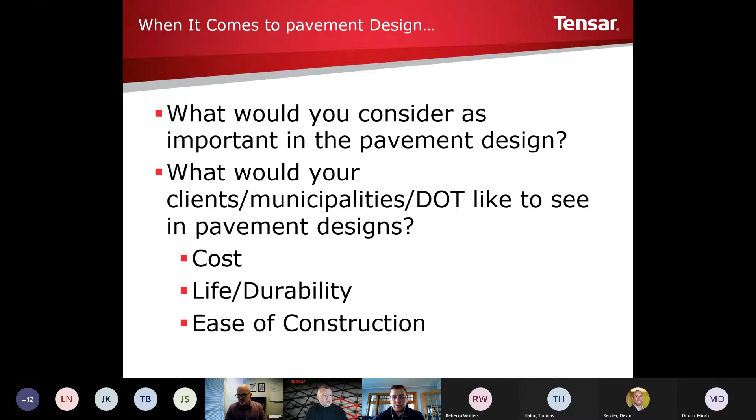Paul, is there anything popping up? Looks like life cycle costs has 3 votes, and all of the above has 2 votes. So okay, life cycle's winning. Okay.

Well, the easy answer is the Tensar triax can help with all three. The geogrids, they save money in the short term and in the long term. In the short term, by using our geogrid, you mechanically stabilize that aggregate layer. But what we can do is reduce that aggregate section when you're talking about unpaved roads. And in paved roads, not only can we reduce your aggregate section, but we can even take asphalt out.

It definitely improves your performance in your roadway subgrade, and that's where most of pavement failures come from; they don't come from top down, it's bottom up. So when you're building on a poor subgrade, and you don't address it at the beginning, that's when your roads tend to fail down the road.

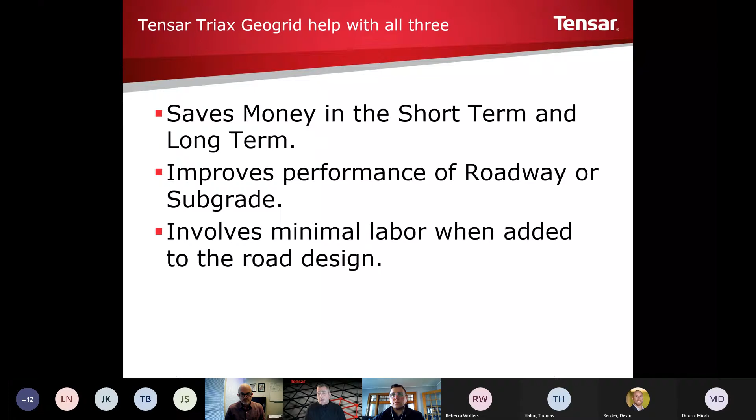And then it involves minimal labor. We've got some videos you can see. It's not hard to install our product. It really just, you set it down and you kick it down the road.

So real quick, I kept this slide in, maybe not so much for this group, but for other groups that I've given this presentation to. I always hear it when I'm out in the field: 'Hey, you sell that fabric?' Well, no, we don't sell fabric. We sell geogrids. But I wanted to go over just real quickly what the difference between the two are.

So geotextiles or fabrics are for separation and filtration. You get some minor reinforcement with your woven, but not your non-woven, that's solely for separation or filtration. And then at the bottom here, you've got your geogrids. These are made to stabilize your aggregate layer, and then you get some minor separation. If you use the proper aggregate, like a 21 AA, you'll get some separation benefits by using that aggregate with the geogrid.

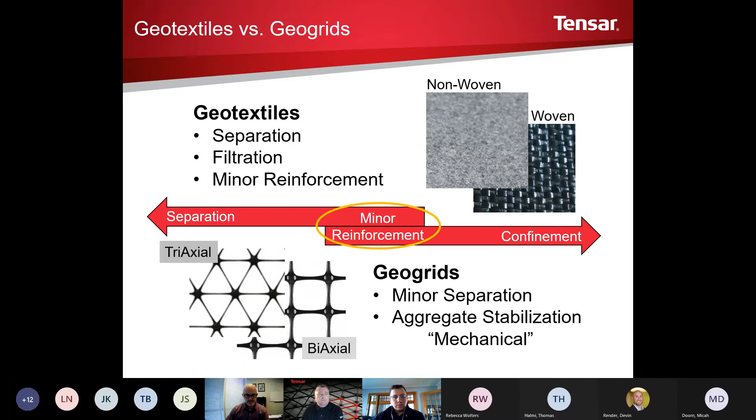Real quick, I kept this in here. The manufacturing process at Tensar, we've been told to take these out, but our product is extruded. It's a single layer process, so it's all one piece. There's no joints or junctions that are glued together, so they're not weak. It's all extruded and it's one piece. That's important when you're looking at geogrids, especially because typically our competition's weak point is at the joints where they adhere two pieces together.

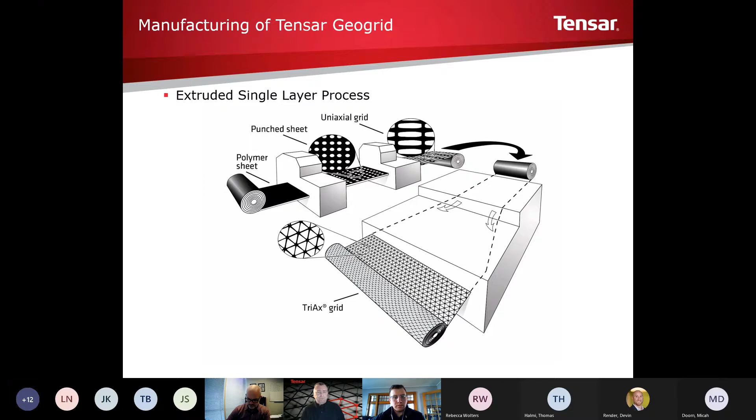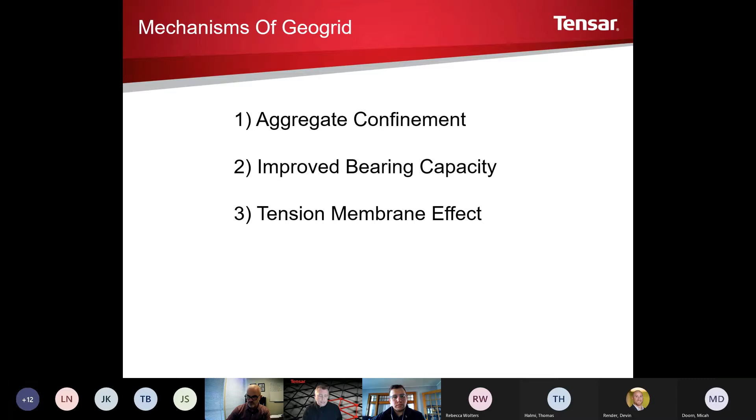All right, so quickly we'll go through the mechanisms of geogrid: aggregate confinement, improved bearing capacity, and tension membrane. Now these are all supposed to act together to make your stone perform better. And this comes from the Army Corps of Engineers.

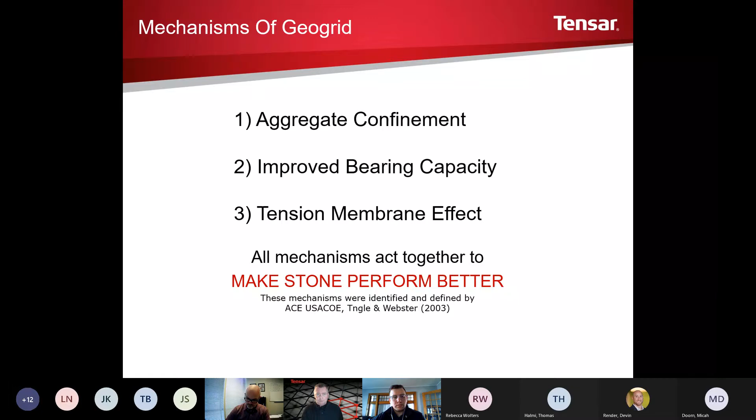So aggregate confinement: our triax geogrid is really designed for maximum interlock with the aggregate. If you see the picture with the stones and the geogrid, what really makes that lock together is the strike through you get with the stone interacting with the geogrid. It just stabilizes that base layer, but the strike through is very important. You want real angular stone to have places to lock onto.

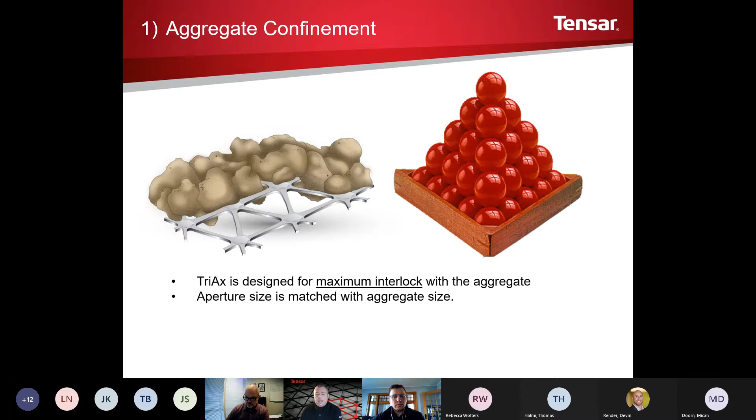The aperture size is matched with the aggregate size. We have three sizes of apertures. A small is our 1.3 inch. We've got a 1.6 inch opening, and then a 2.24 for our larger stone.

With improved bearing capacity, or the snowshoe effect, this seems a pretty simple idea, but because of the design of our grid, as opposed to a biaxial grid, which we'll see in a minute, it really does disperse the weight out in all directions, which makes it perform better than most of our, or all of our, competition.

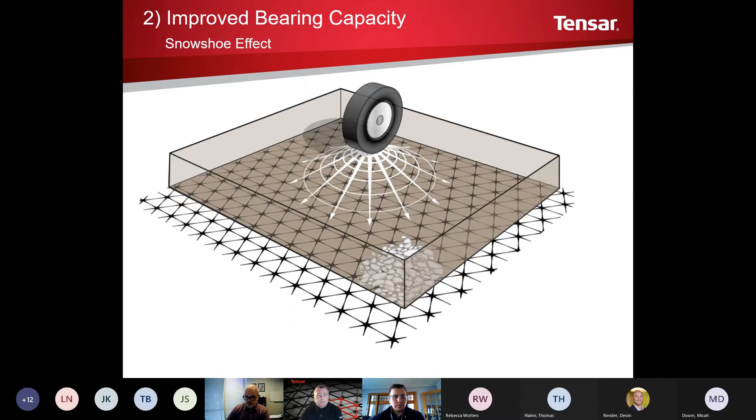Second slide on the bearing capacity.

This is we're looking at a biaxial geogrid versus a triaxial geogrid. This is a polar chart here, with these concentric circles going out, getting more stiff. When we're talking geogrids, we're usually looking at low strain stiffness.

You can see here with the biaxial geogrid, it's stiffest along the ribs, which would make sense. When you go over to the other side with the triax, it's almost a circle in there.

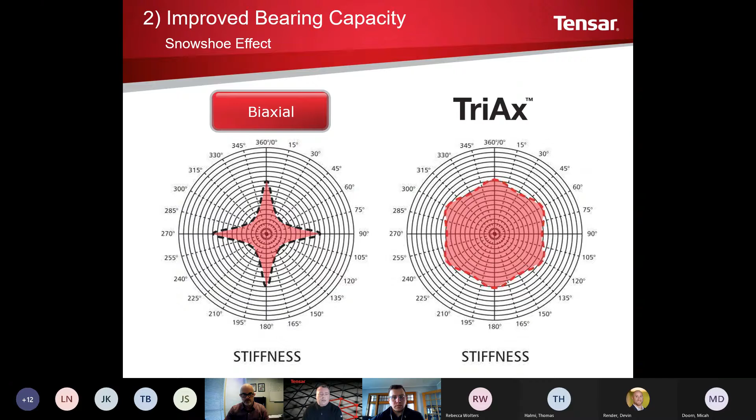Again, because with the hexagon or the six triangles together, it's dispersing that weight equally in all directions, and it just makes it perform better.

The third was the tension membrane. This really applies to geotextiles. When using a geotextile or a fabric, to get any kind of stabilization out of it, it needs to be tensioned, kind of like a hammock. So with the geotextile, you're not getting much stabilization.

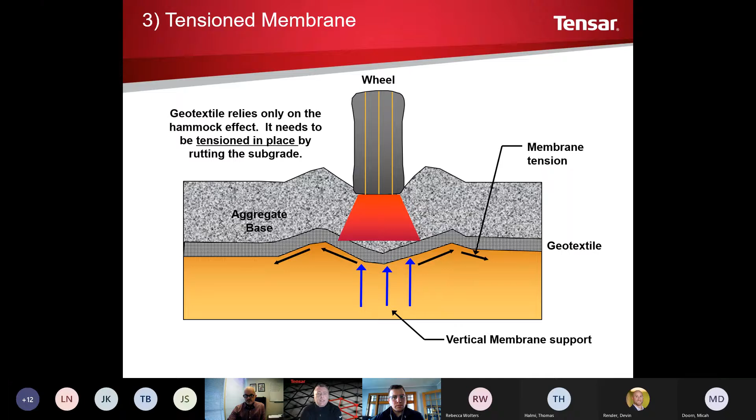It has to fail almost before you actually get any stabilization out of it. So that one wasn't, that's more for the geotextile than the geogrid. But those are the three that the Army Corps came up with for the geogrid.

Real quick, again, I just mentioned it, but these are the two types of geogrids we're currently looking at: your biaxial geogrid and your triaxial geogrid. So when I'm talking about aperture, it's the opening size. You got your ribs, and then the junctions or the nodes.

And in the triax, we've beefed up all of those. We've got a high aspect rib ratio. It's hard to see in this picture, but it's a little bit easier in some to come. The nodes or junctions have been supported. So the triax is very superior to a biaxial geogrid.

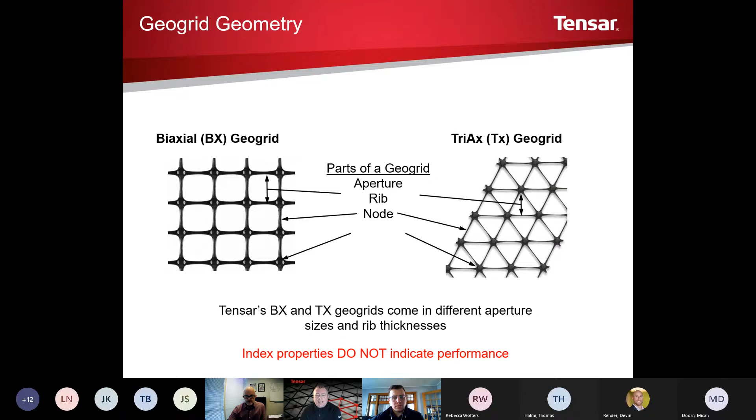And one thing that I'd like to note, that index properties do not indicate performance. And we can show you that by the next two slides.

This is the Giroud-Han design theory. I'm not going to go through it. To be honest, I'm not sure if I could, even if I really wanted to, but we're searching for H, or your aggregate base thickness, in here. And if you look close enough, you'll notice the one thing that's not on there is tensile strength.

A lot of BX specs come out solely on tensile strength, and that's at one point that's all Tensar sold as well, and so we were probably guilty of pushing that as much as anybody else. But tensile strength is not indicative of performance when it comes to a geogrid. For this Giroud-Han, this is for an unpaved. This is the design theory used for unpaved.

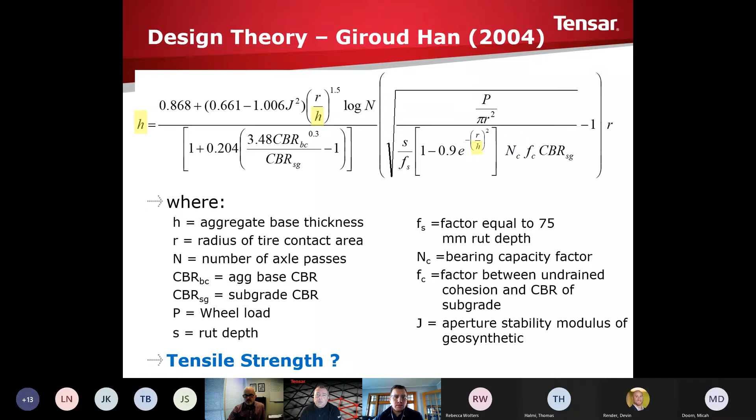When we're talking about a paved surface, or AASHTO 93, it's the same thing. There's nowhere in this equation is there a tensile strength for a grid.

So when grid came out with biaxial, it was an easy thing to look at and say, alright, this is the tensile strength of this, and that's what we're going to call out in our spec. But it's not very indicative of performance.

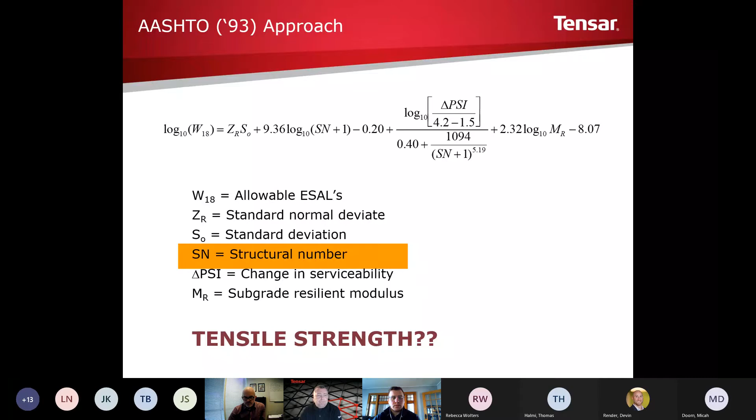James, we had a question about what happens to the waste product from the manufacturing process, when we're punching and drawing the grids. Yeah, we capture and recycle all of our waste, and reuse it. Was that? Yeah, I think that answers it.

Well, we capture it. It's been a while, so we've got a lot kind of stacked up over there. But yeah, we use it all. We recycle it and reuse it.

So why BX or why TX versus BX? I started on this a few minutes ago. You can look at the top, the junction strength. This is very important because the weakest spot on most geogrids is going to be the junction. And on our triax, we really did beef up that joint or that junction.

Another thing that's very important is the rib profile. If you look under the BX, those look flat. And that's not just the picture, they are flat.

With the rib profile for the triax, when we were designing it, we took that biaxial rib and basically just turned it on its side. But there's a lot more surface area for the stone to grab onto, which is very important. That high aspect rib ratio adds a lot to the performance of any geogrid.

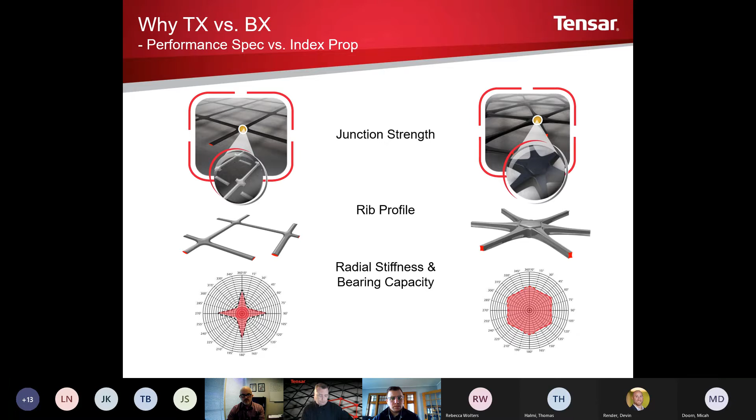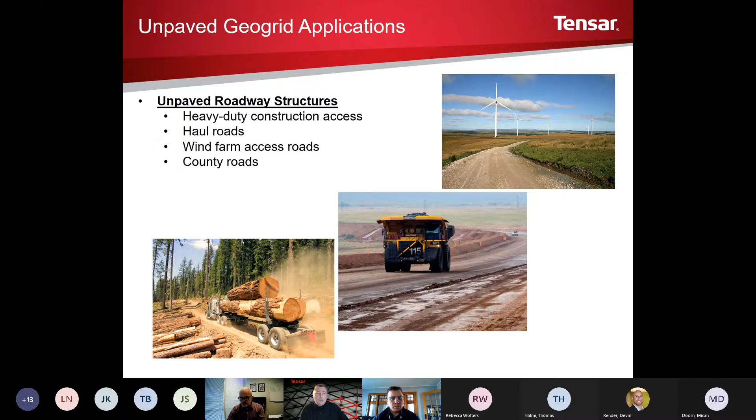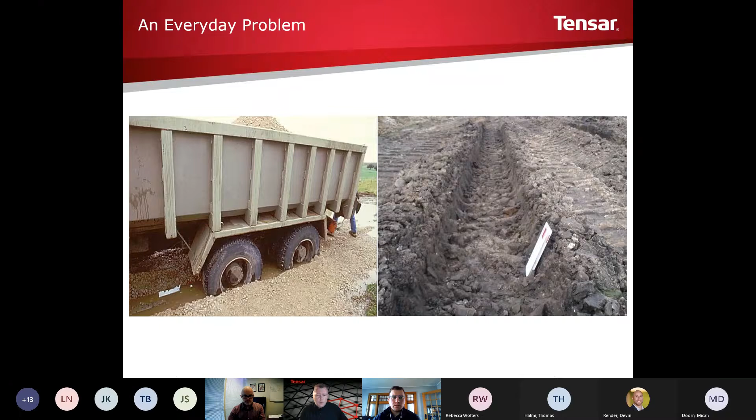All right, so we're going to go through subgrade stabilization. Any unpaved surface that you're looking for: heavy duty construction access roads, wind farms, county roads, anywhere that you're not paving. I mean, this is our bread and butter right here, soft soils. It's an everyday problem. I'm sure you guys have all seen it just as much or more than I have. But this is what Tensar can solve for you with our grids.

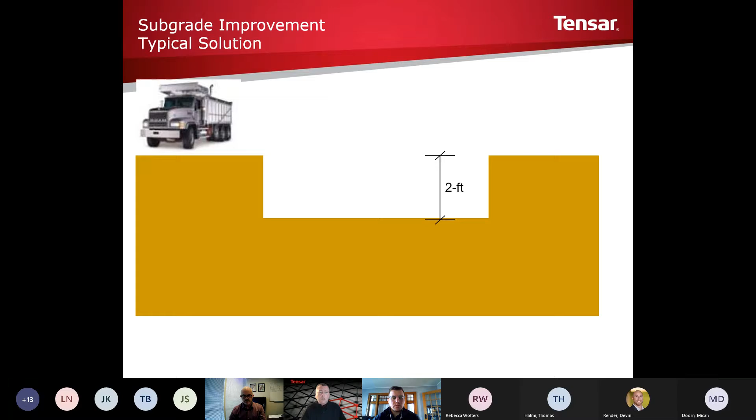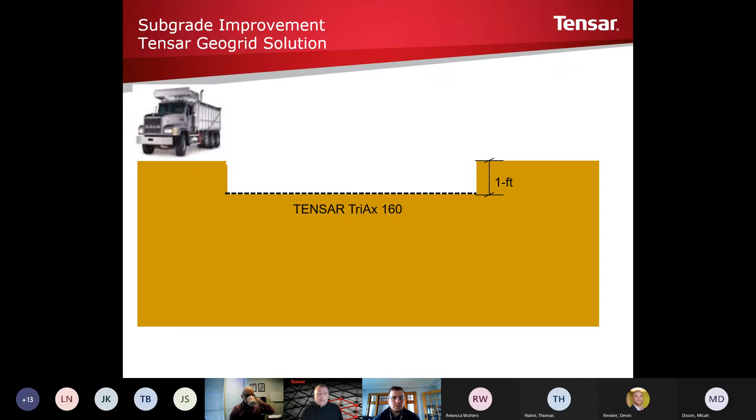With the Tensar, though, in that same situation, you can see we excavated, but it's half. In the first situation, you were digging down 2 feet. With Tensar TriAx, you reduce your aggregate section up to 60%. And in some cases, you wouldn't have even had to undercut anything. If the subgrade was a certain CBR, we could roll the grid out right on grade and go from there. But the performance of the TriAx, again, it can reduce your sections in half or more.

I apologize. It seems like I'm going through this quick, but I am. So let's look at some of the costs, or industry costs. The example here, if you looked next to the unreinforced, we've got excavation at $5 a cubic yard. And these prices, whether they're low or high, aren't going to have a huge effect on the outcomes here. But just know that the higher those prices are, the better the grid actually looks. So if you're looking and saying, 21AA, $18 a ton, that's not even close. It's probably not right now, but again, the higher that number is, the better the grid would look.

So in this situation, we've got a section that we've designed to, and I guess in the end it doesn't matter what it is, but it came out to 24 inches of aggregate over a subgrade of a 1.3 CBR. 1.3 CBR is pretty low, so I'm not surprised that there's 24 inches of aggregate. Well, let's go on the next side of that. What would happen if we put a woven fabric in there? Again, all the original costs are the same. Unreinforced, it came out to $24.88 to build that section or that system. With the fabric, and these are average prices, we put in $2.50. So it did take a couple dollars out as compared to the unreinforced section, coming in at $21.

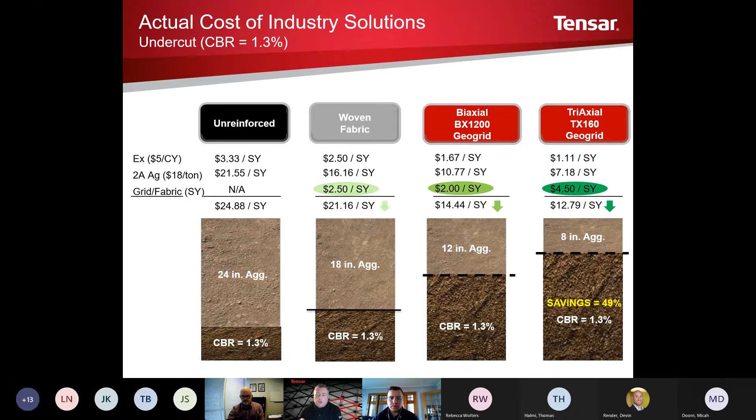Now here's one of just all Tensar solutions. Actually, it looks like the stone went to $20, but the excavation is $5 a cubic yard. And you can see it's similar to the last slide. Even with your biaxial geogrid in there, $15.67 with 12 inches of aggregate. We make a TriAx that costs the exact same as a biaxial geogrid, but it actually gives you 2 inches better of performance. So we can take 2 inches out just by using another product that's the same price. So you can see that one came in at $13.39.

When you start getting into our higher end grids, the third one over, our TriAx TX5, that went down $1, and it also reduced another 2 inches of aggregate.

The farthest one on the right, our TX7, that's at present our highest performing grid at $5. But look at the overall cost. Even though the grid itself costs $5, your aggregate cost went way down. So we're trying to look at these as system costs, not just product costs, because when someone gets that $5 square yard price, not everyone can get past that. But when you look at what it's taking out of the project, being aggregate or HMA or labor or excavation, the overall cost using a higher end grid is almost always the lowest.

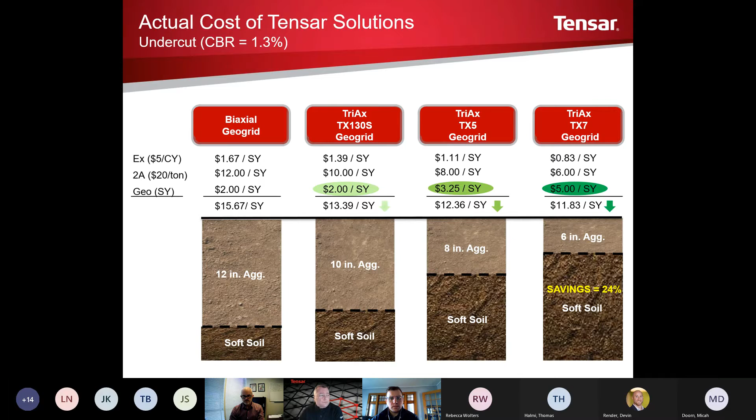Real quick, just to go over again what I just spoke about. By using the Tensar Triax, you can reduce your aggregate sections or requirements up to 60%. Again, that's going to reduce your labor and your equipment needs. And it's going to reduce the frequency of maintenance because you're stabilizing your aggregate base, your aggregate layer. It's just going to push your frequency of maintenance down the road because it's stabilized and it's not going to fail.

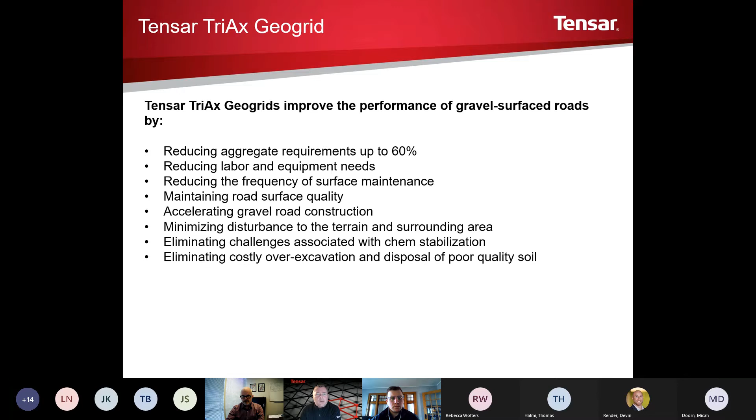And we've got reports that we can show, with schedules for that. Accelerating the gravel road construction. There's just a lot of different benefits for the Triax. Sorry.

James, we got a question, maybe a tough one to answer, but what is the expected life of a geogrid? How would we answer that one? Yeah, it's a tough one to answer. I will say this: we just pulled one out of a project that was in for, I think, 26 years, and it looked like we had just installed it. We actually took a section of it and we have it hanging in our R&D department, and they're doing more tests on it now. They said that was almost 30 years old.

Paul, I'll have to get back to him on that. I don't have a set date, that they last 30 or 40 years. Yeah, I'll get back to them on that. I think they're assumed to last quite a long time since they're buried and not exposed to UV, et cetera.

Right. Oh man, I just passed my video here. I do want to show this. It's kind of loud.

This is one of my favorite videos. Let's guess where there's no geogrid. Right there, that's where the geogrid ended. That's just an example. The subgrade underneath that whole section was the exact same. You can see how much just putting the geogrid in really added to the performance of that. That dump truck was axle deep when there was no geogrid underneath.

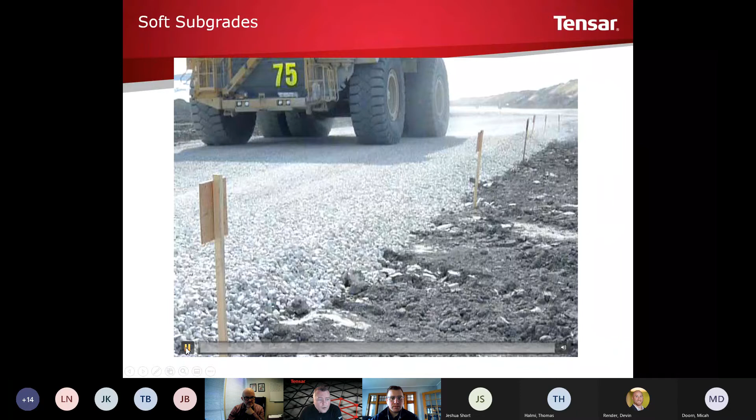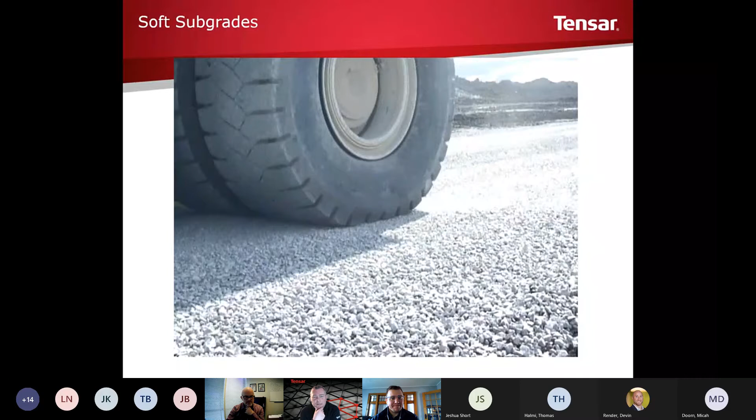James, how heavy was that? Do you know? Geez, 50 to 70,000 pounds. I don't know. To be honest with you, I couldn't tell if it was loaded or not. And you guys have a lot of specific questions. I can look it up for you. I'm not 100% sure. Well, let's go back. Can we get a model number on there? I'm looking under, like it's actually going to change. It was kind of hard to tell. I think your audio goes out when you're playing a video. We'll take that as a side note, try to find out the weight of that. Okay. Yeah, we can find out. With that video, you couldn't really tell if it was loaded. But we'll definitely get back to you on that.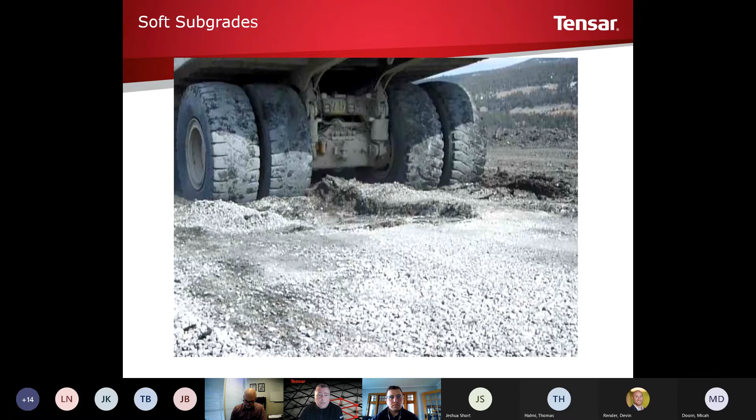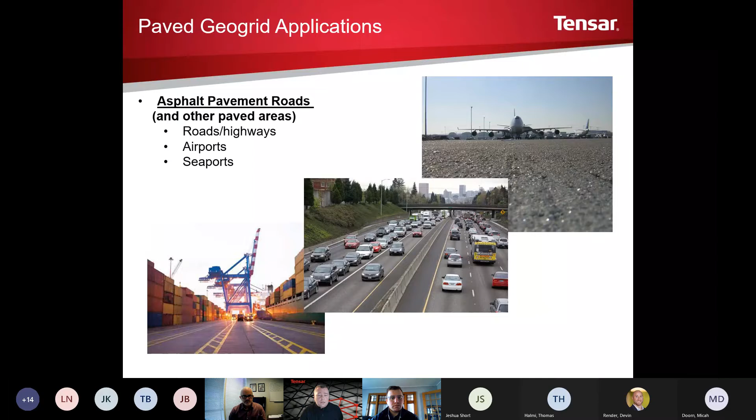But we're going to go over some pavement optimization. I keep these slides in because they're important to show. Anywhere that you've got a paved area, roads, airports, parking lots, any project that you're doing, we can help you out in all of these. So industry solutions.

On the left here, you've got your unreinforced. Again, no geogrid, no nothing. You've got your 3-inch wearing course, a 6-inch binder, 14 inches of aggregate, and then your soil. This was what we were designing to. So again, you got your woven fabric. It did take out 2 inches of aggregate. You went from 14 inches of aggregate to 12 just by using a woven fabric.

But let's look at our lowest end biaxial geogrid under the same conditions. It reduced your aggregate section from 14 to 10. So even by using an old, kind of out of date technology grid, it still works. We didn't stop selling it because it didn't work. We had just come up with something new and better.

If you look at the last section there with the triaxial geogrid, your original section was 14 and we took the aggregate section all the way down to 8. And I listed this as industry solutions because this is what a lot of non-Tensar people would have done in this situation.

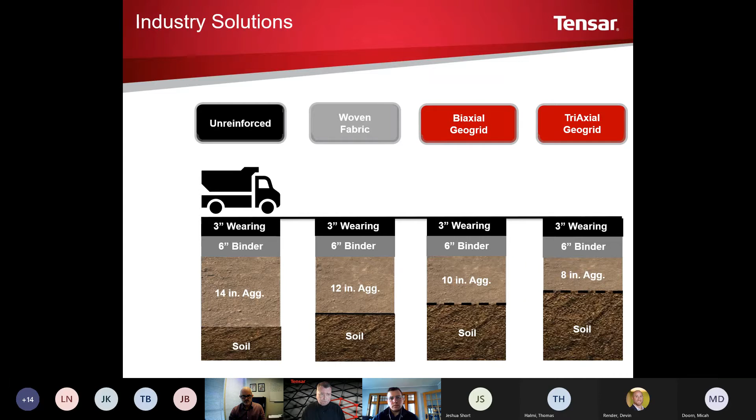But had you actually gotten someone from Tensar involved, we could have helped you with this. Not just taking out your aggregate, but actually taking out some asphalt, some HMA. So here's another example that's up on the top right. You've got your costs. Again, $5 for excavation, $80 a ton for wearing, $70 for leveling, and $18 for your aggregate. And the TX5 geogrid at $3.50.

That actually includes installation. So back to the example, unstabilized, 4 inches of HMA over 10 inches of aggregate. Now that came out to 117,000 ESALs, or a structural number of 3.08, and it's $28.12 a square yard. Now, there's 3 different ways that Tensar will look at this. We can say, you want the highest performance you can get.

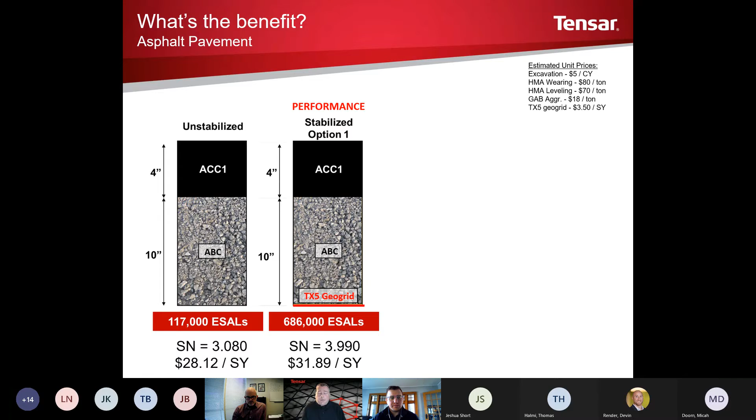Money's no object, and I can hear the laughs even through the mute. But some people actually do like this. A lot of private customers, if they're gonna have to own that road or pavement section, they want it to last. So by not taking anything out, just adding a geogrid underneath the original section, you can see what it did to the ESALs. What's that? It's like 6 times the ESAL count.

It increased structural number, but it also increased your costs, which is why it's only people that have extra money and they're looking maybe down the road to less maintenance costs to offset some of that. But we call this the performance option. No reduction in anything, just put the grid under, and this is what you get.

The other thing we can do is a cost neutral option. You can see in this case, we took a 1/2 inch of asphalt out and a full inch of aggregate. What we're doing here is we just want the cost to be the same. So as long as we don't go under the original ESAL count or structural number, and we can get the cost as close as we can to the original cost, that's what we're looking for here.

And in this case, you can see, we took a 1/2 inch of asphalt out and an inch of aggregate. And even in the original is $28, our section here is $27.64. It's a little bit less, but we're going to call that even. But even if it was straight even, look at the ESAL count. You're still getting about 3 times more ESALs out of your road section, because of putting the geogrid in there and you're stabilizing that aggregate base.

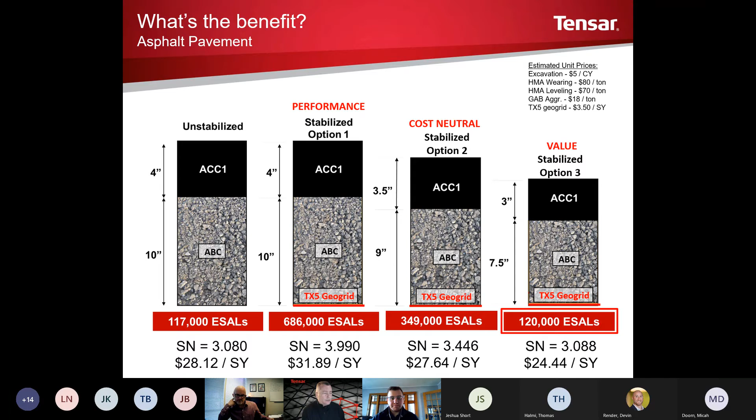Can I move on? Yep. Good. Okay. Oh man, we've only got like a few more minutes.

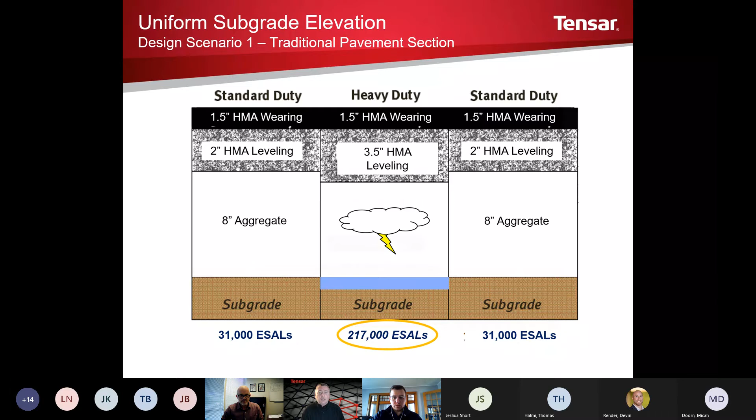Uniform subgrade elevation. This was just a design scenario, and I'm sure people see this a lot, where you've got a heavy duty section and a couple standard sections. One easy thing to fix this with is grid. Also, it ends up being a bathtub when it rains when you do this. I'm rushing now, so I'll probably just fall apart. But by putting GeoGrid underneath the heavy duty, you can see we were able to put every section at the same depth, and we increased the ESAL count of your heavy duty section there.

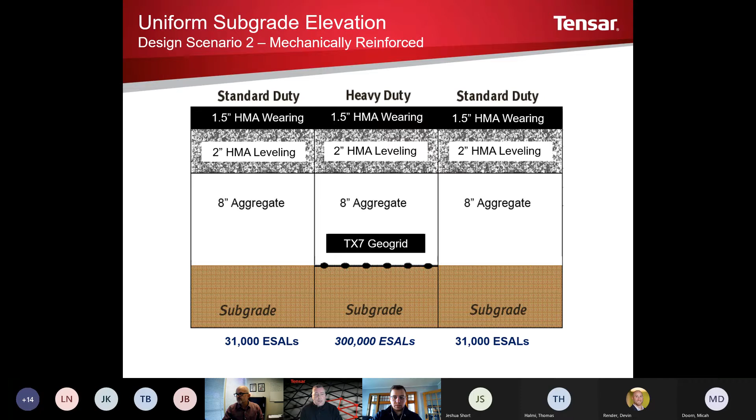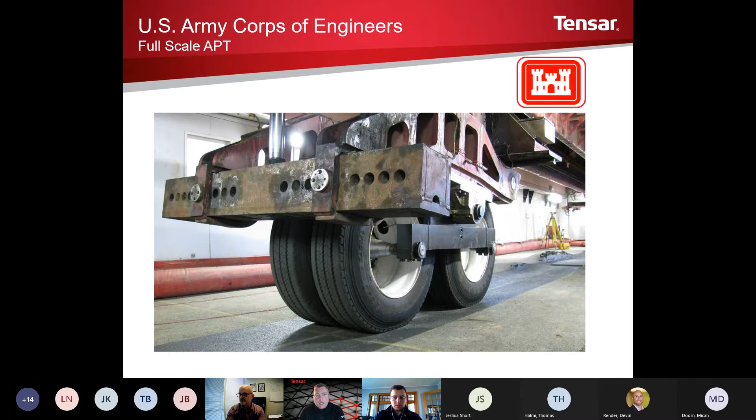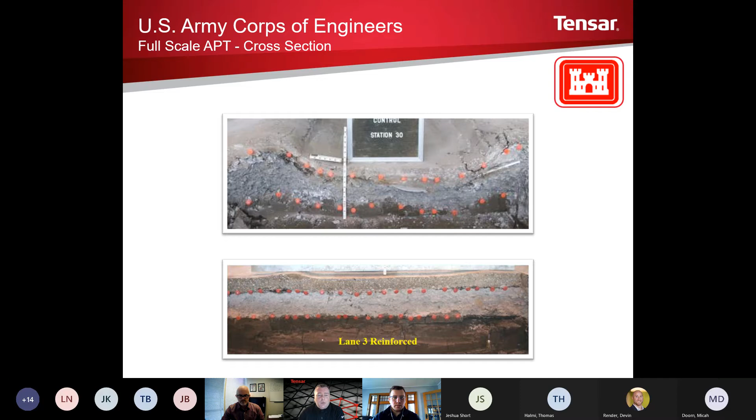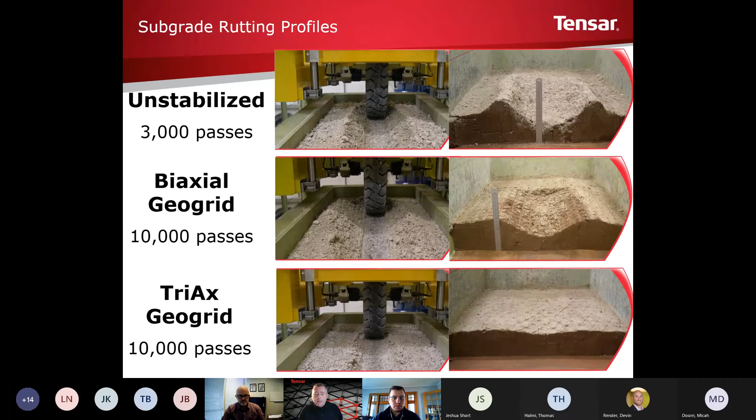It was on a smaller scale. The first one was the Army Corps. I guess what I wanted to show with this, look at the pictures on the right, the rut, and then look just from top to bottom. There's almost no rutting at all on that bottom section that had the triax, which had 10,000 passes as opposed to the 3,000 passes on the first one, the unstabilized. The difference between the biaxial geogrid and the triaxial geogrid just shows the difference in performance. I'll mention it now while we're going through these, because I'm not going to read through all of them: we actually have some new products coming out that perform even better, so keep your eyes and ears open for that.

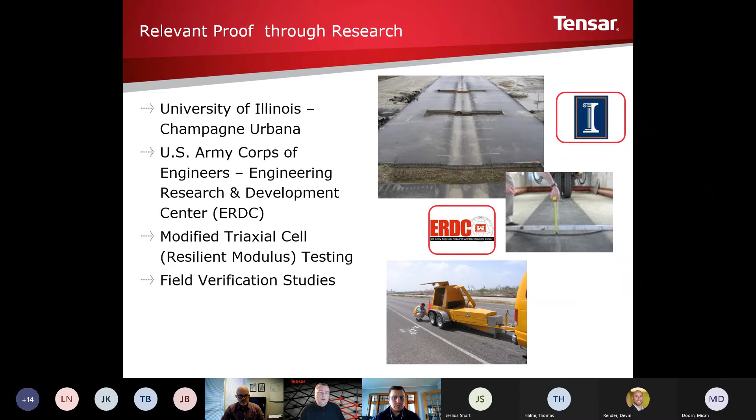MDOT has seen it because they were looking at doing some test sections with it this year. So again, between the last slide and this one, there are so many, and these aren't even close to all of them. We've got so much testing and research on all of our products.

Okay, I put this in here. It was from the New Hampshire DOT, only because it was weather related, and I thought it applied a lot to our region. So they did a test section up in New Hampshire. You can see on the bottom right, they had 19 inches of aggregate. I don't think it says how much HMA was on there, but we reduced the section down to about 11 inches with our TX 160. This was testing the freeze-thaw effect and what impact it had on the geogrid. You can see here, this is part of the case study, and I can send it all if you'd like. The base course with the TX 160 was reduced and it held up better than the non-reinforced section.

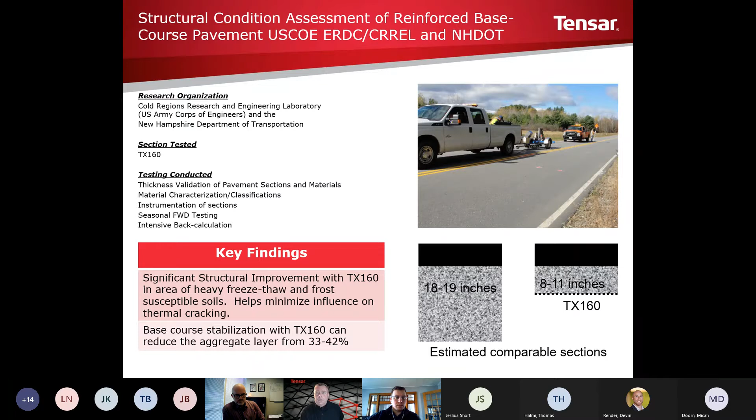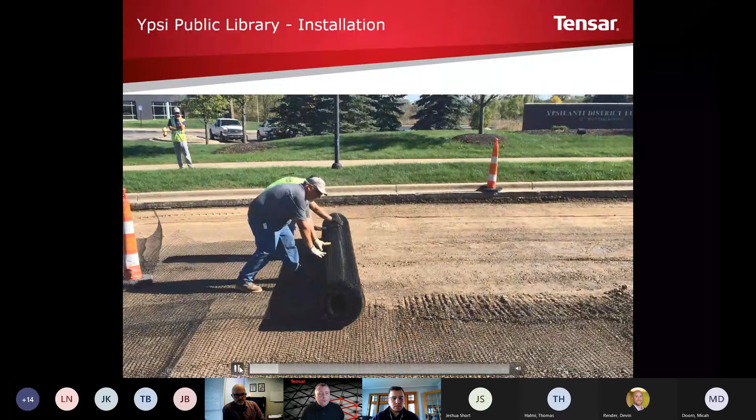Here is actually a local project. You can see how easy... can you guys hear me? Not really, with the video. Okay.

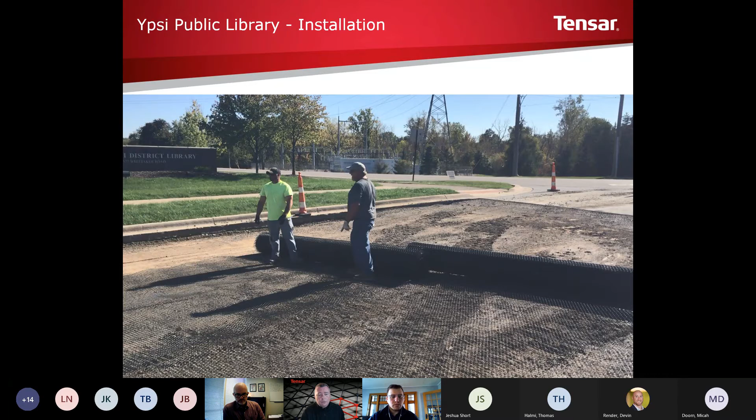So you can see how easy it is to install. Now you have to look at your overlaps. You can see there, it looks like they've got about a 12-inch overlap from one roll to the next, and that's the minimum. We always require at least a 12-inch overlap. The softer your subgrade is, the more overlap you're going to need, but the most overlap we require is 3 feet, 36 inches. So again, it's not hard to install. It's very easy to install. Now, after you unroll it, you're going to back-dump some aggregate and just push it.

Can you guys hear me now? There you go. Oh, good.

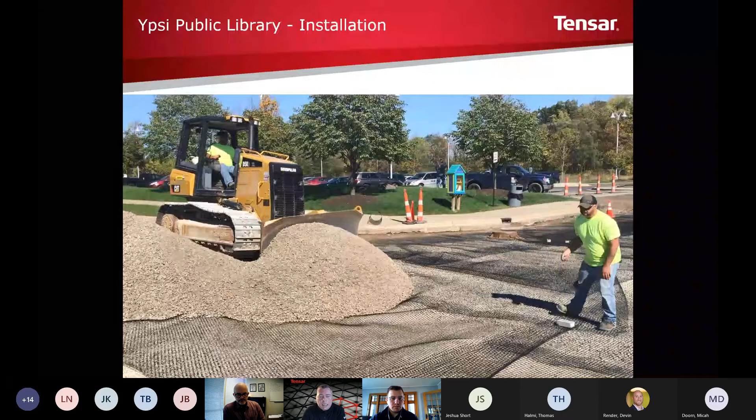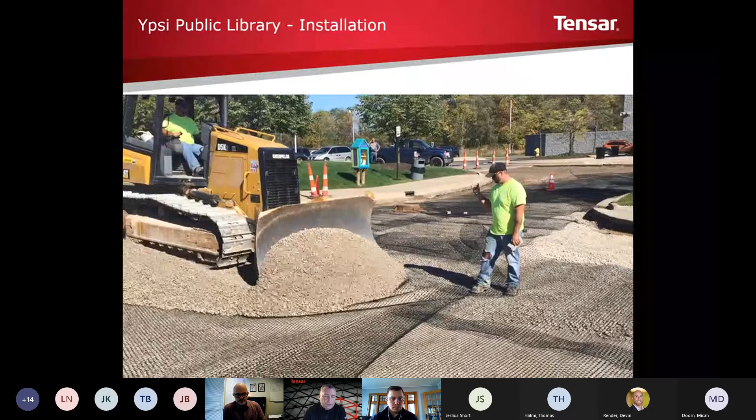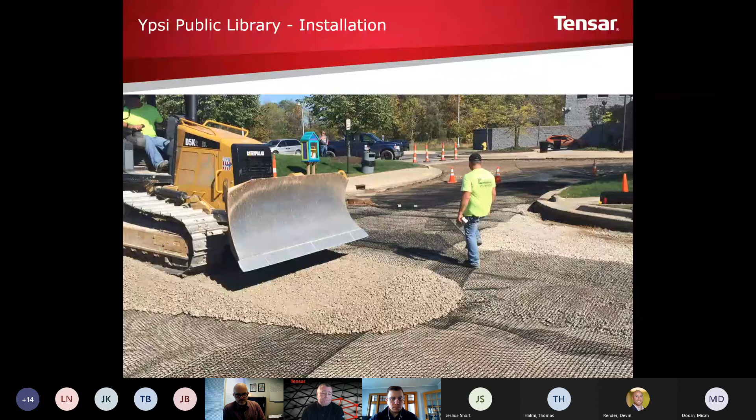I like how they have another person up here kind of directing, because you can see that with the triax, it does wave. Now, this is an older picture; we've actually changed how we make it so it doesn't wave as much. The product we have now stays more flat. But again, just push the stone out over it. You're going to want to obviously compact it. If your subgrade's really wet, I'd say do several static roll passes before you put the vibrator on, because the vibrator will just want to draw that moisture right up.

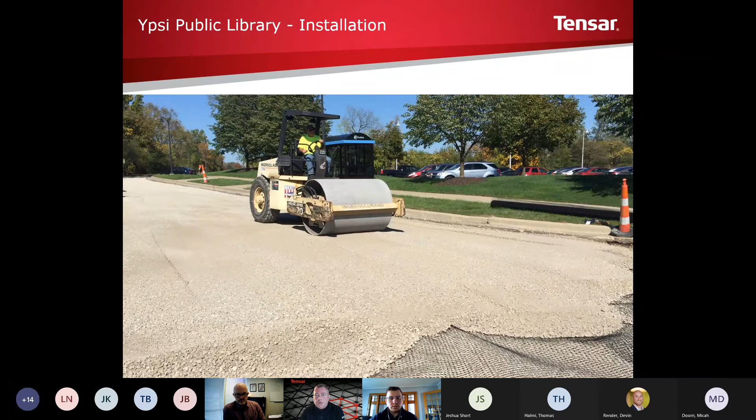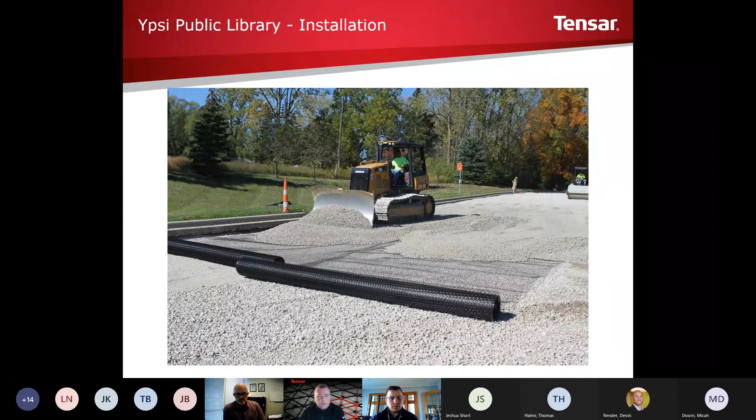I guess here's another picture, again from the Ypsilanti Library. This must have been a two-layer job, because they've got stone down and then he's pushing stone out over it again. It's very easy to cut around corners or manholes. A little razor knife, or we have a couple of razor hooks you could use, but any little razor knife cuts through very easily.

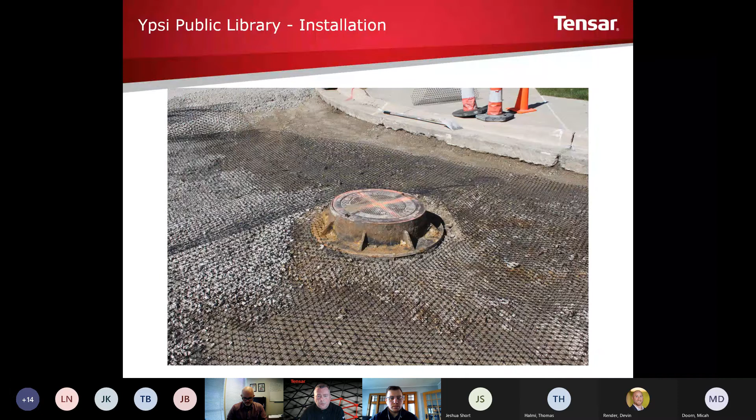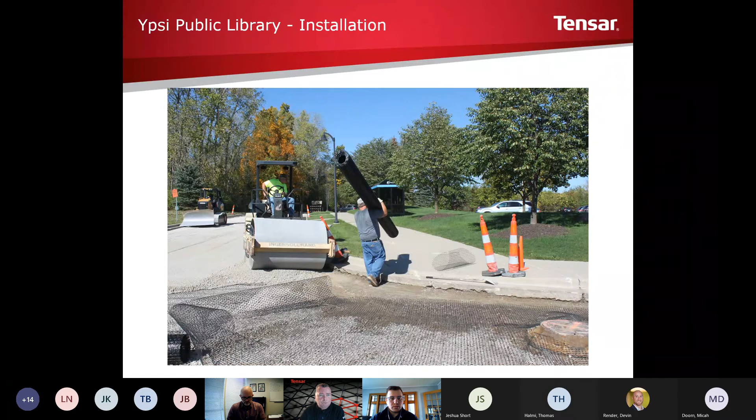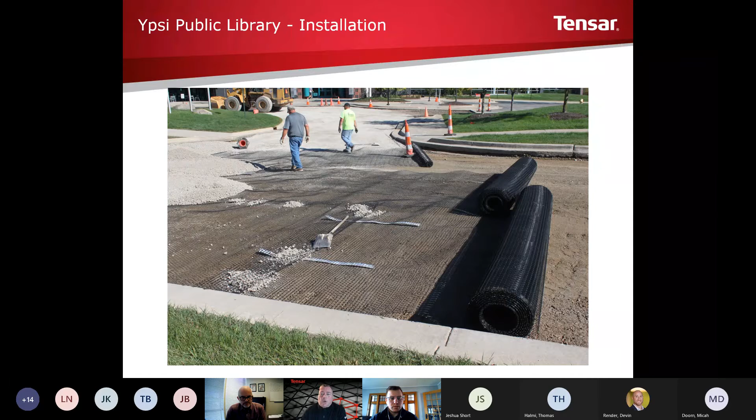The ends of these pieces do tend to want to recoil, it's just the memory. Just throw down a couple shovelfuls of aggregate to hold those down, and you're good to go. So the important thing is make sure you keep your overlaps where you want them.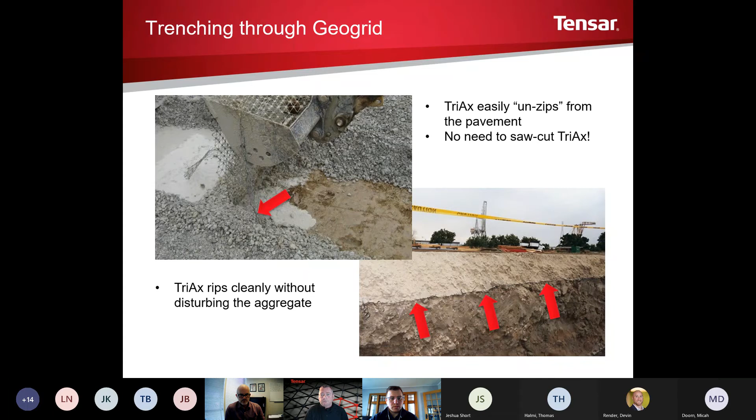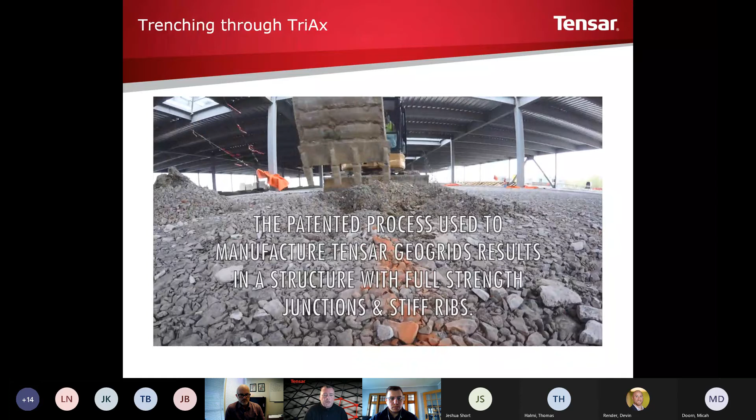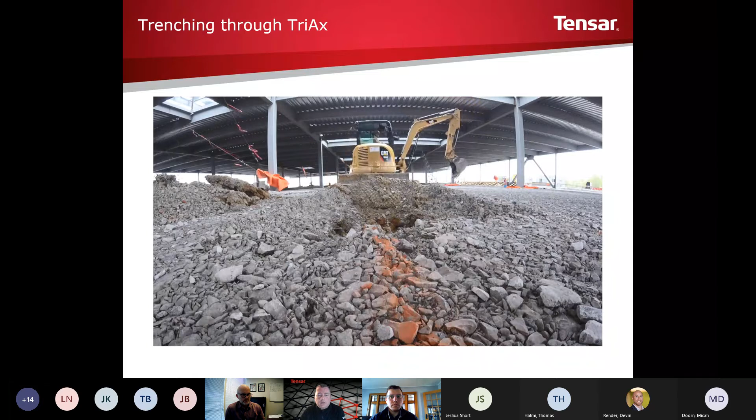Here's the video. Now if you would have put a woven fabric down, you can't trench through it. For utilities, it would just pull in all that aggregate. But with the geogrid, the teeth on that bucket just go right through it. You can kind of see a little bit of it back there. So you can trench through it. So if you just want to go do the whole thing and then trench through afterwards for some utilities, you can do that.

So this was the project I was alluding to earlier. It's under MDOT's innovative construction methods, this is what they got it in as. Now this is a report that we had sent out, your original design. I don't know if you guys can see my cursor, but there's 3 or 4 different designs here: one without geogrid, two with, and one concrete.

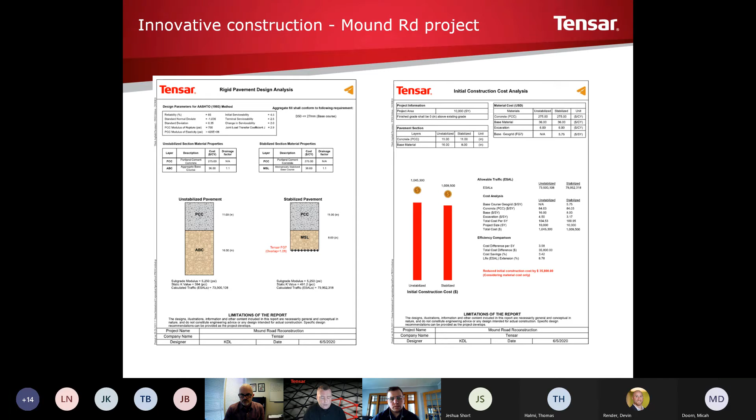In this Mound Road project, they did have a rigid pavement section as well. We didn't talk about it at all, but there is benefit to putting grid under a rigid pavement. You can see here we didn't reduce any of the concrete, but we did reduce the aggregate. I think the main benefit of putting it under concrete is the settlement between your concrete pads—by putting grid underneath, they'll all settle uniformly as opposed to differential settlement. So obviously in this case too, we took out the aggregate and the cost was less for this option as well.

Okay, I kind of got towards the end. The rest of these are just questions, myths, and facts, and I can keep going, but in case anyone needs to get off now, Paul, is there any other questions in there? Yeah, we have 3 other really good questions here, if you want to we could probably focus on these. Yeah, I'd rather do that than these myths and facts.

Does cutting the geogrid reduce the integrity of its overall strength? No.

Oh man, I got my background on, so you can't really see it. But no, I mean you could shear through all there.

Now the ends of these pieces where there's nothing containing it wouldn't give you any support, but it's not going to give you any less performance. Now if you're trenching out, you would want to put GeoGrid back in, but in that case you'd also want some overlap. But just cutting through it, I don't think it's going to affect anything. It's just probably a pretty small overall percentage of surface area if you're cutting out one little section.

Yeah, there's another one. I guess there's a lot of different ways we can look at that, but the GeoGrid has to be... I mean, if you took one piece and cut it down the middle, and there was no overlap, then yes, that middle part would probably fall right through. So there has to be some overlap on your material.

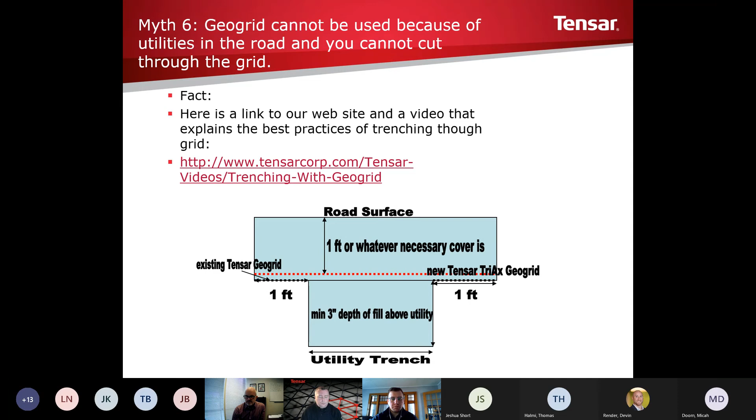Any other questions from the group?

I grabbed this off LinkedIn, but I like it. It said there's always going to be someone who can say they can do it cheaper. And that's true, especially in the GeoGrid world. But a lot of times you get what you pay for.

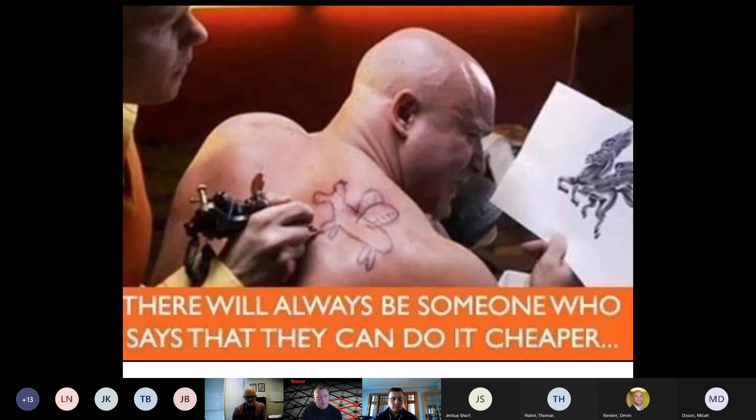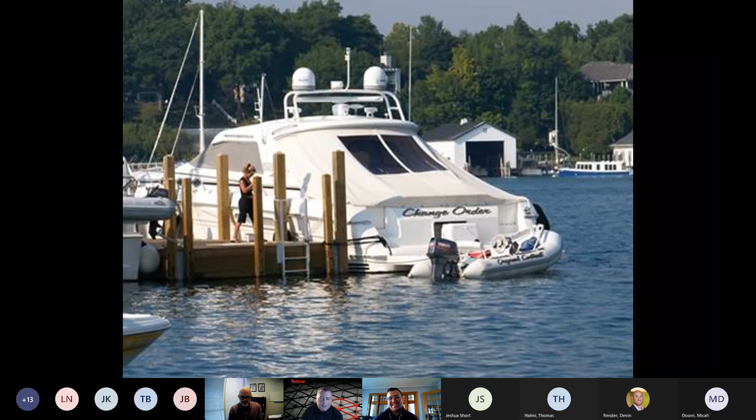And I think this might be my second to last slide. I don't know if you can see it. That boat says change order, the big one. The little one's like original design or concept. So I don't know, I'm going to leave that one. I'm not going to comment on that one. I don't know who's on, I don't want to get in trouble.

So that was it. I really thank you guys for listening. Hopefully you got something out of that. I definitely think if you could get on SpectraPave and look, it's a great software. It's very easy.

It's not Tensar's, we designed it, but we designed it using Giroud-Han and AASHTO 93. It doesn't work just because Tensar says. I mean, we used other people's design theories for our software.